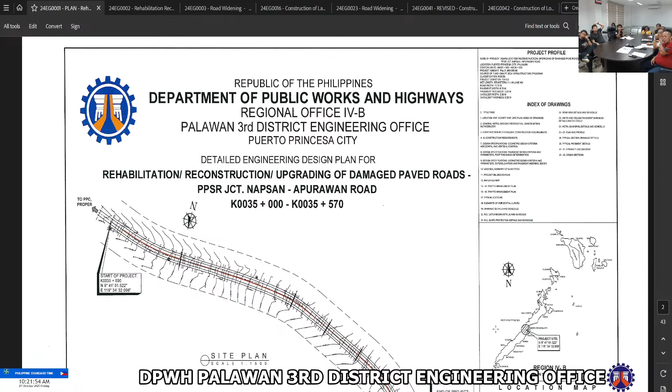Good morning po. Rehabilitation, reconstruction, upgrading of damaged paved roads, PPSR Junction, Napsan, Apurawan Road, kilometer 0035 plus 000 to kilometer 0035 plus 570. Next page. Sa upper right side po. Project po. Sabihin po. Opo, konti.

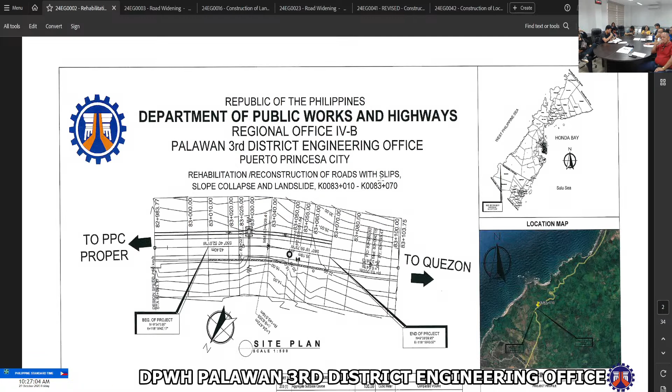For contract ID 24EG0002, Rehabilitation, Reconstruction of Roads with Slips, Slope Collapse and Landslide, Aramaywan-Berong-Quezon, Puerto Princesa Road. Contract location K0083 plus 010 to K0083 plus 70, Aborlan, Palawan, with ABC amount of 5,243,000. For this project, we have other general requirements. Project billboard hanggang dun po sa mobilization and demobilization. Sa works po, meron po tayong removal po ng existing structures which is 0.23 meter thick PCCP.

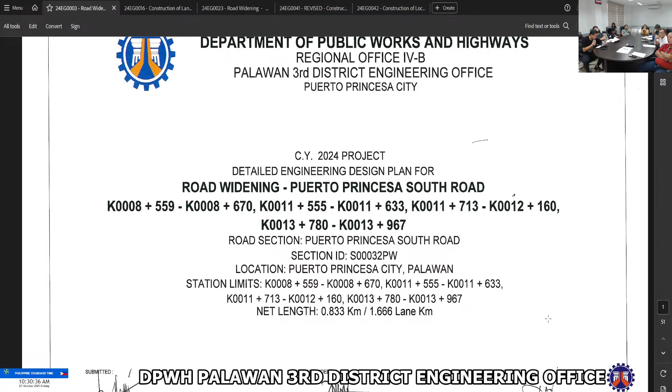Contract ID 24EG0003, road widening Puerto Princesa South Road. K008 plus 559 to 008 plus 670, next station is K0011 to 11 plus 633, 11 plus 713 to 12 plus 160, 13 plus 780 to 13967. ABC amount is 27,440,000. So, yung project natin is widening.

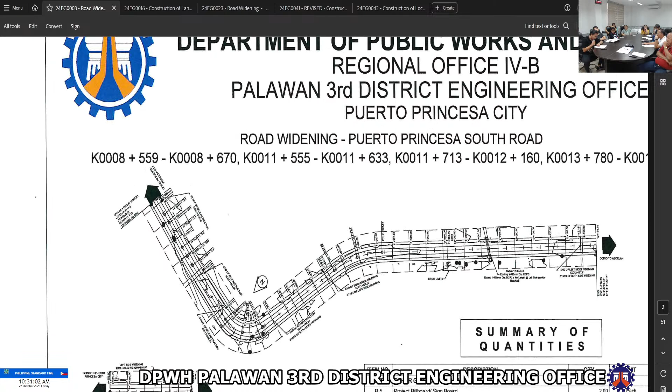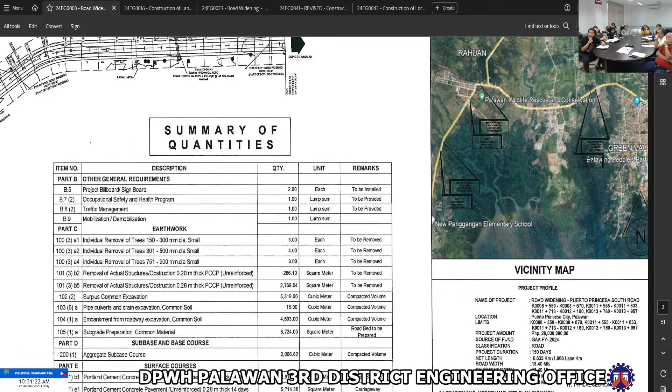Then sa project profile, ang target total width natin ng road is 18.4 meters, which is 13.4 ang carriageway and 2.5 meters yung shoulder. Quantities are project billboard, occupational safety and health program, traffic management, mobilization. May removal of trees, then removal of actual obstruction and existing pavement, which is 28 and 20 kasi may reconstruction tayo para tumama yung alignment sa Aramaywan Bridge.

Surplus excavation, pipe culvert, embankment, subgrade preparation, aggregate subbase course, then 20 and 28 thick ng PCCP for shoulder and carriageway, reinforced steel para sa line ditch, U-type, and culvert, 910 stone masonry para sa culvert din. Then white na thermoplastic para sa ating for safety.

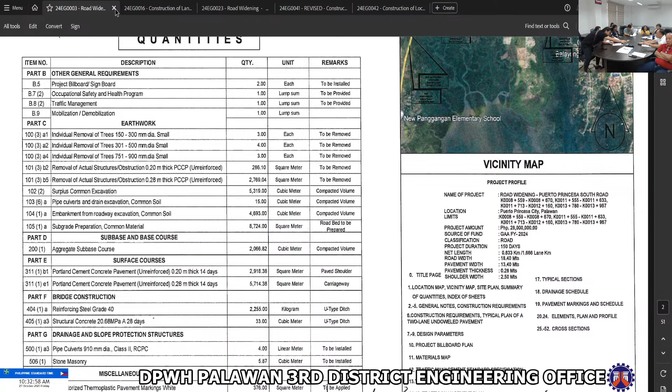Next project, contract ID 24EG0016, construction of Langogan Pedestrian Suspension Bridge. Good morning. I'm going to discuss contract ID 24EG0016, which is the construction of Langogan Pedestrian Suspension Bridge. An overview, this project is a 110 meters pedestrian suspension bridge located at the resettlement Caritas, Barangay Langogan.

This project comprises the construction of two reinforced concrete towers and installation of 40 mm diameter main cable with a suspender or hanger cable of 16 mm, and a cross beam and floor planks. I'm going to discuss the specification of the cable first. The cable, a very important part of the bridge, is wire rope 6 by 36 grade 1960 Newton per millimeter square IWRC, which is an independent wire rope core.

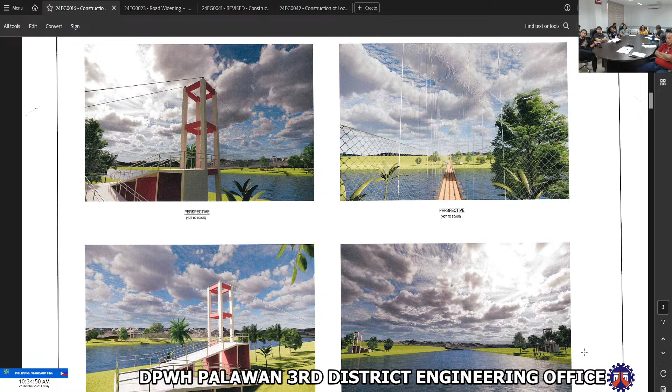The scope of work of this project is the project billboard and signboard, then occupational safety and health program, mobilization and demobilization. Then there's structure excavation, common soil, comprised of 599.28 cubic meters. Then the embankment from structure excavation, which is 61.44, and a gravel fill of 9 cubic meters.

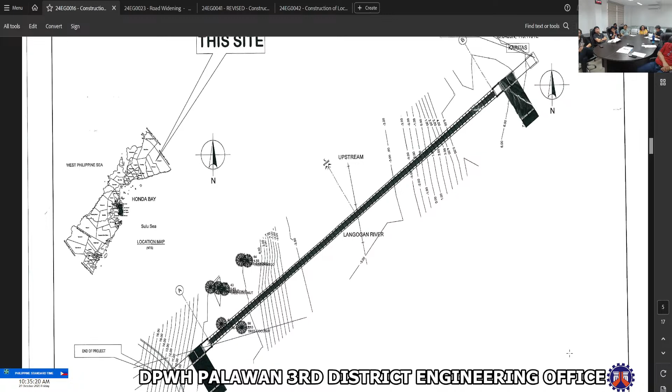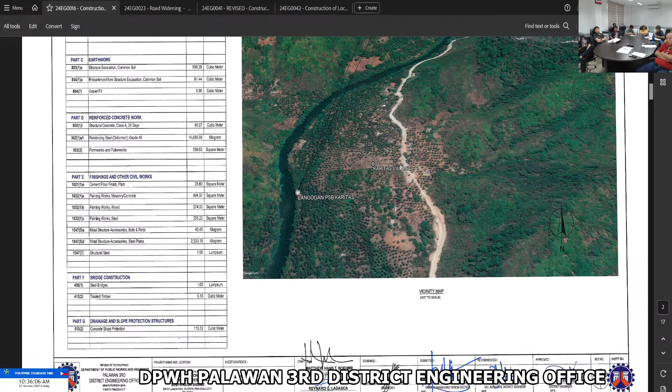Then structural concrete, the construction of the towers and the anchor block, which is 45.37 cubic meters. Reinforcing steel deformed bar, grade 40, 14,680.66 kilograms. And formworks, 558.83 square meters. For finishing and other civil works, the cement floor finish, plain, 23.6 square meters, and painting works for masonry concrete, 804.57 square meters. Painting works for wood, the floor planks, 274 square meters.

Then painting work for the steel, 255.22 square meters. The metal structure accessories, bolts and rods, these are the thimbles, the U-bolt part of the structure, which is 40.40 kilograms. The metal structure accessories and steel plates, this part is the anchorage, the construction of the pulley. And the structural steel, this is the cross bracing, the cross beam where the floor planks will be installed.

Then for concrete slope protection, we have 113.52 cubic meters. And this item is steel bridge, the supply, delivery and construction of the wire rope, one lump sum, and the treated timber, 9.10 cubic meters. This treated timber are the floor planks of the project. That's all. For any question, please visit our office, planning design section.

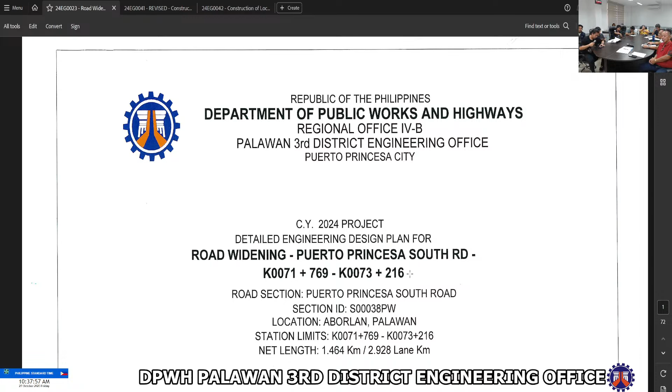Contract ID 24EG0023, road widening Puerto Princesa South Road, K0071 plus 769 to 73 plus 216, with an approved ABC amount of 58,918,580 pesos. So this project is a road widening along Puerto Princesa South Road, Station 71 plus 769 to 73 plus 216, with a calendar days duration of 206.

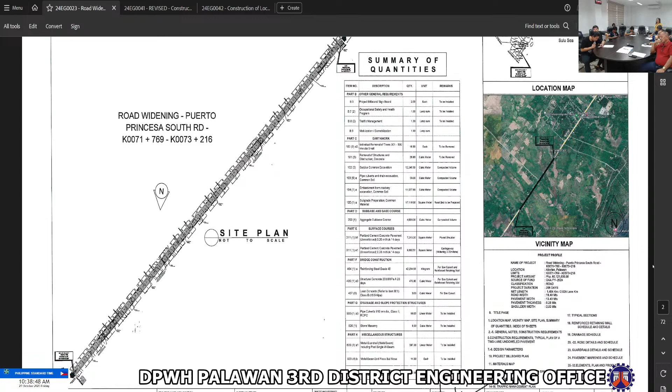Net length is 1.464 kilometers. It is a both side widening of the road with a target road width of 18.4 meters. Pavement width is 13.4 meters, 0.28 thickness, and 2.5 width shoulder.

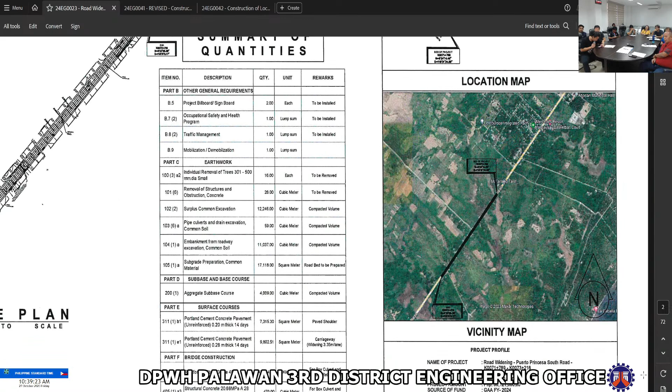So the quantities are project billboard, occupational safety and health program, traffic management, mobilization, demobilization, removal of trees, removal of structures, surplus excavation, culvert and drain excavation, embankment from roadway excavation, subgrade preparation, common material, item 200, item 311 for paved shoulder, 311 1E1, 0.28 thick PCCP for the carriageway, which is 3.35 per lane.

Reinforced steel, grade 40, and structural concrete 20.68 MPa at 28 days for box culvert and retaining wall, reinforced retaining wall. Lean concrete for the box culvert, pipe culvert 910 for cross drain, stone masonry for the head wall, metal guardrail, end piece bull nose and reflectorized thermoplastic for safety. So yun lang po.

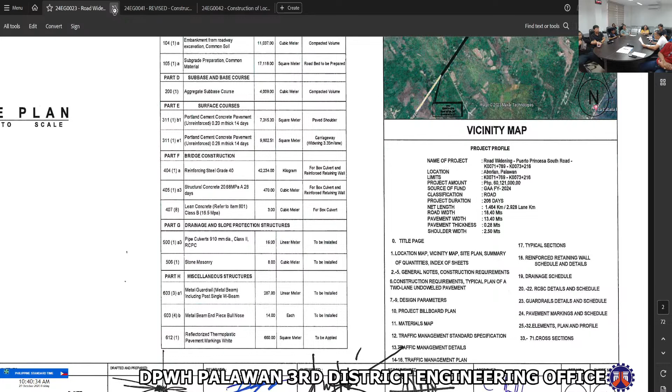Next, contract ID 24EG0041, construction of road, Barangay Magbabatin. Meron ba? Isa lang. 24EG0041, construction of road, Barangay Magbabatin, Aborlan, Palawan. Station 0+00 to Station 0+243.

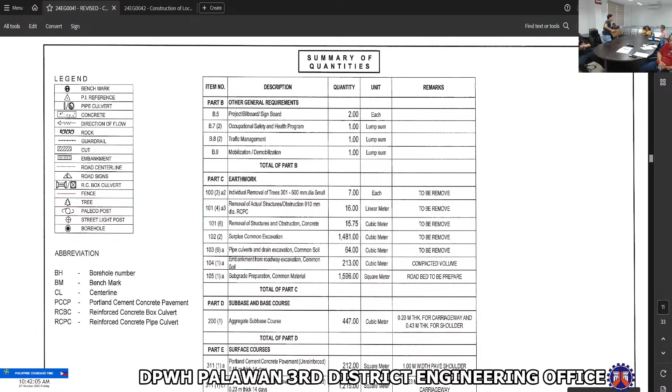So, meron din po 0.23 meters thickness na carriageway. Pababa. So, reinforcing steel grade po para sa ating head wall. Reinforced concrete head wall and RCPC na 910 mm diameter, remove and replace. Meron din po tayong grouted riprap na class A para po sa wing wall ng ating reinforced concrete head wall na slope protection. Yun lang po. O may tanong po ulit, punta lang po sa planning.

Project contract ID 24EG0042, construction of local roads at Barangay Kabigaan. Hello po, good morning po. For the contract ID number 24EG0042, contract name, construction of local road at Barangay Kabigaan. Contract location, station 0+000 to 0+426 meters. Next page po. Net length po natin is 0.426 kilometer. Physical target 0.852 lane km.

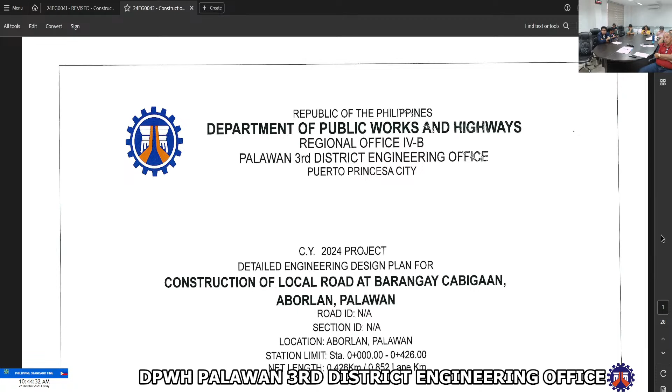For the summaries of quantities, we have a project billboard, occupational safety and health program, traffic management, mobilization, demobilization. For earthworks, we have removal of actual structures and obstruction, 910 mm diameter RCPC, 9 linear meter. Surplus common excavation, 1,946 cubic meter. Pipe culvert and drain excavation, 40 cubic meter.

Embankment from roadway excavation, 2,123 cubic meter. Subgrade preparation, common materials, 3,431 square meter. For part D, or sub-base and base course, item 200, aggregate sub-base course, we have 1,139 cubic meter. For surface courses, Portland cement concrete pavement, unreinforced, 0.15, 39 square meter paved shoulder. Tapos Portland cement concrete pavement, unreinforced, 0.23, 2,152 square meter carriageway.

And for drainage and slope protection, we have pipe culvert, 910 mm diameter, class 2 RCPC, 9 linear meter. And item 506, stone masonry, we have 52 cubic meter. Ano sir? Okay, sir. Sa road width, we have 8 meters. Pavement width natin is 5 meters. Thickness nga po is 0.23. Tapos yung shoulder natin na 1.5. Yes, sir. Yun lamang po. Any questions po, sa design plan inspection na lang po. Thank you po.

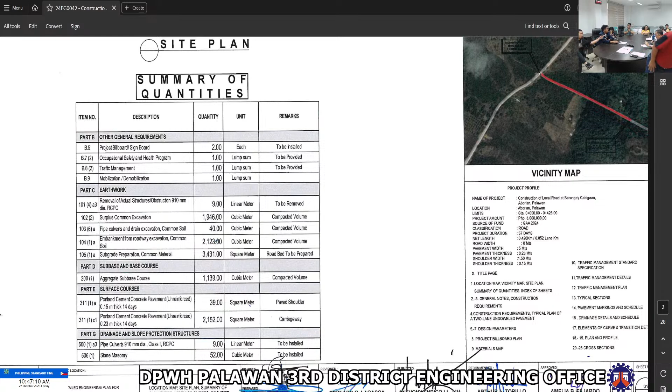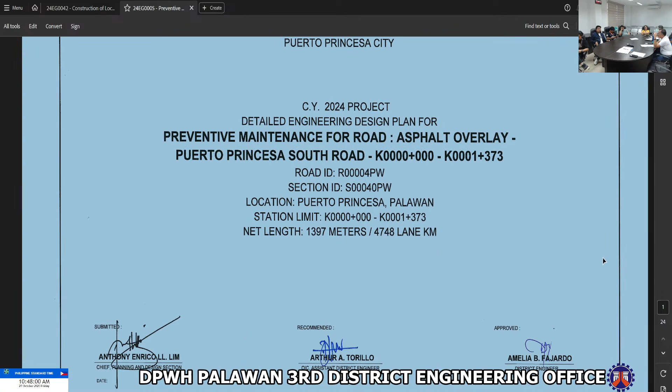We have the next project, contract ID 24EG0005, preventive maintenance of road, asphalt overlay, Puerto Princesa South Road. Engineer Maulog will be the one to discuss this. Okay. Good morning. Contract ID 24EG0005, preventive maintenance of road, asphalt overlay, Puerto Princesa South Road, K000+00 to K001+373. ABC amount is 971,150.

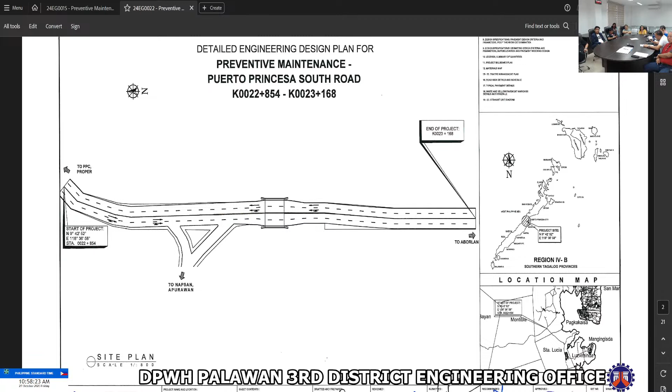Okay na, next. Contract ID 24EG0030. Preventive maintenance of road, asphalt overlay and bridges and approaches along Puerto Princesa South Road.

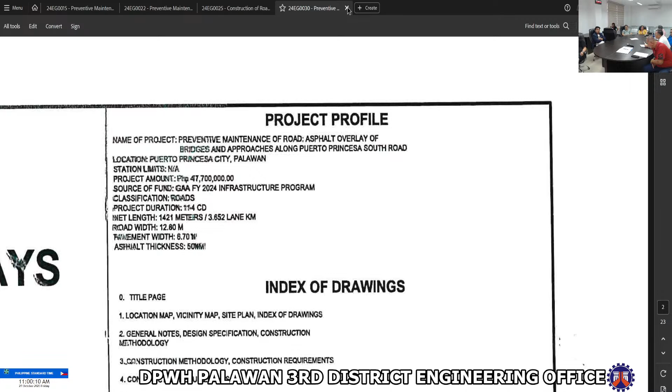Okay. Thank you. Contract ID 24EG0039. Construction of road, Barangay San Manuel. Sino in charge dito? Discuss. Okay. Contract ID 24EG0025, construction of road leading to Mount Calvary.

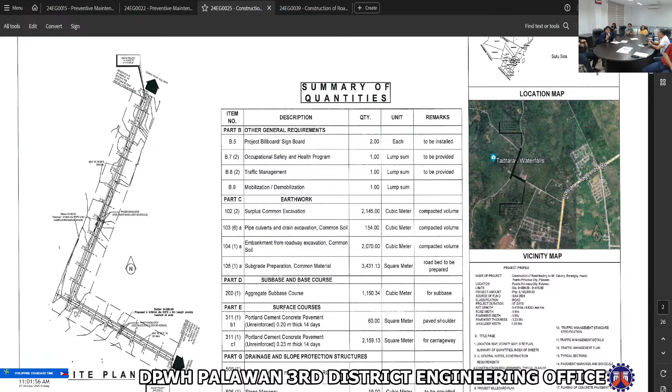For earthworks we have surplus common excavation 2,145 cubic meters. For pipe culvert and drain excavation we have 154 cubic meters. For embankment from roadway excavation, common soil 2,070 cubic meters. Subgrade preparation common materials 3,431 square meters. For aggregate subbase course, we have 1,150.34 cubic meters. For surface courses, we have Portland cement concrete pavement 0.2 thickness, 60 square meters. For Portland cement concrete 0.23 thickness, we have 2,159 square meters.

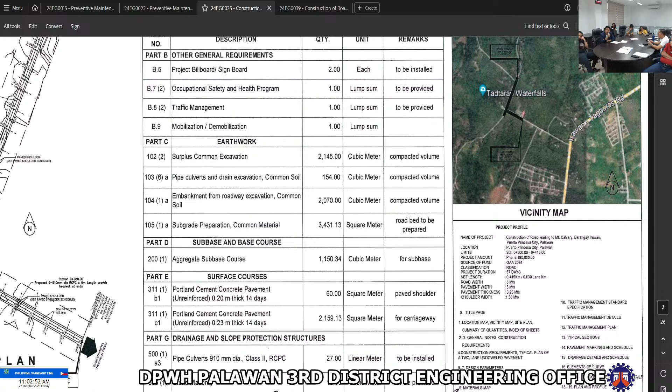And for drainage and slope protection, we have pipe culvert 910 mm diameter class 2 RCPC 27 linear meters, and stone masonry 19.0 cubic meters. Road width is 8 meters, pavement width is 5 meters, thickness is 0.23, and we have shoulder of 1.5. Kadugtong lang ito papuntang Mount Calvary.

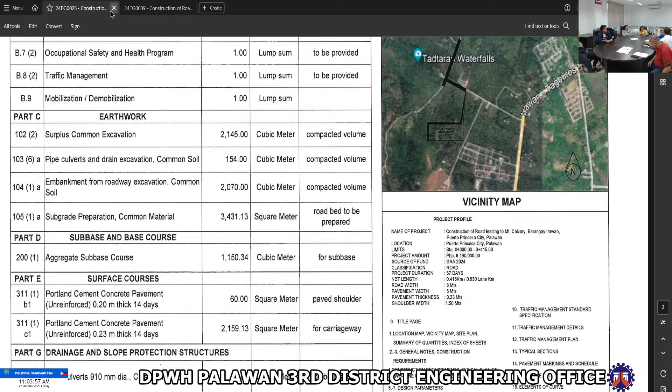Construction of road, Barangay San Manuel, Puerto Princesa City, Palawan. First section, station 0+00 to station 0+337.5, and our second section, station 0+00 to station 0+061. Ano po sa next page? Upper right bullet sa project profile.

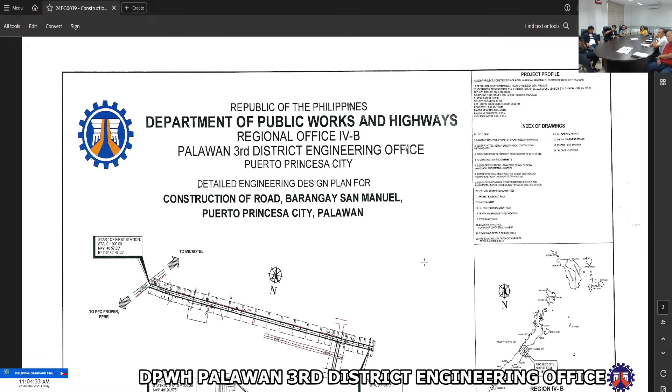Ayan po. Okay po. So yung ating road width po is 5.2 meters to 7 meters. Yung 5.2 meters po is para sa ating first section, with carriageway na 4 meters and shoulder of 0.6 meters. And sa ating second section po, na 5 meters yung carriageway and 1 meter po yung shoulder width.

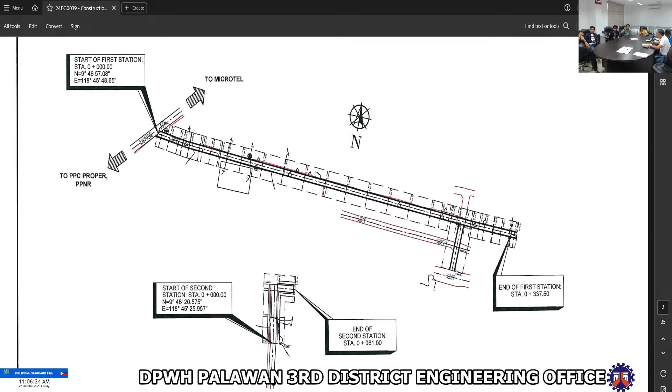Next, contract ID 24EG0043, construction of road, Barangay Santa Monica. For the contract ID number 24EG0043, contract name, construction of road, Barangay Santa Monica. Contract location, station 0+00 to 0+220, Puerto Princesa City, Palawan. ABC amount, 4,950,000.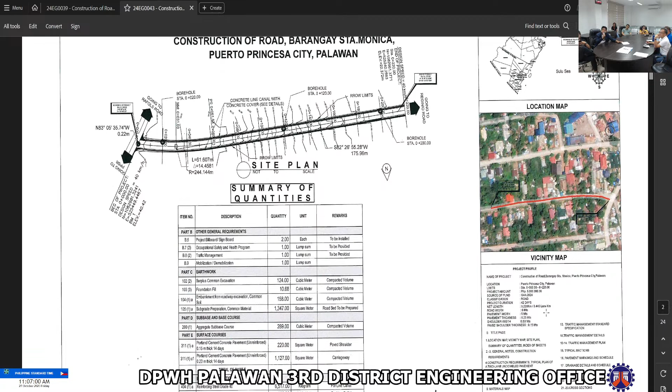The summary of quantities, we have project billboard, occupational safety, traffic management, and mobilization. For earthworks, we have surplus common excavation, 124 cubic meter. Foundation fill naman, 10.68 cubic meter para sa ating line canal. Tapos, embankment from roadway excavation, 158 cubic meter. Subgrade preparation with common material, 1,347 square meter. Aggregate subbase course, we have 289 cubic meter.

For item 311, surface courses, Portland cement concrete pavement, unreinforced, 0.15 thickness, we have 220 square meter. Tapos Portland cement concrete pavement, 0.23 thickness, 1,127 square meter carriageway. For bridge construction, we have reinforcing steel grade 40, 6,517 for line canal. For item 405, structural concrete, 20.68 MPa at 28 days, we have 108 cubic meter for line canal.

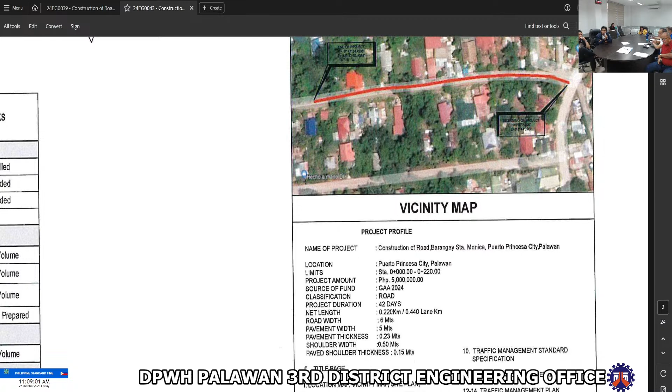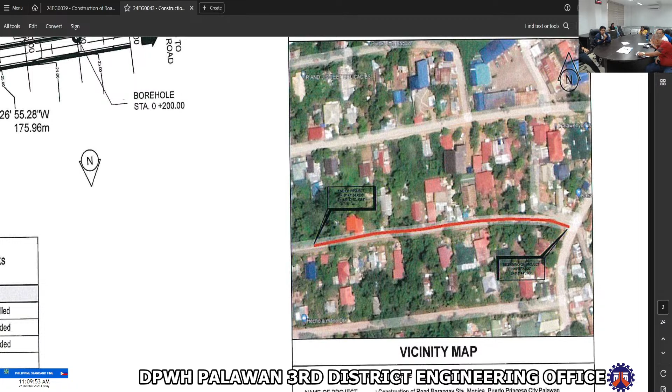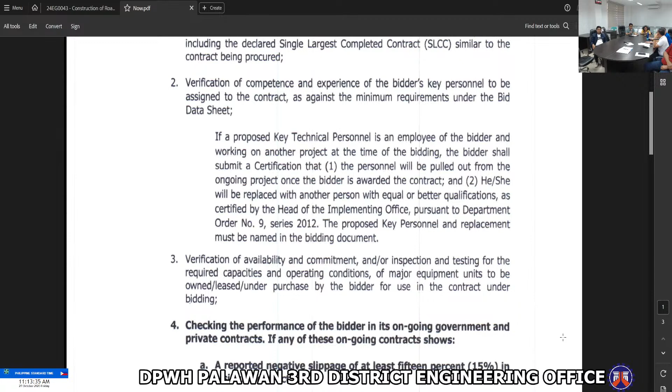Hello. May pinapaabot ho ang aming resident auditor na kung kayo ay magli-list ng equipment, it should be conditional list lang po. Until na may award ho sa inyo yung contract, doon na kayo magsasubmit ng list ng equipment. So number 4, checking the performance of the bidder in its ongoing government and private contracts.

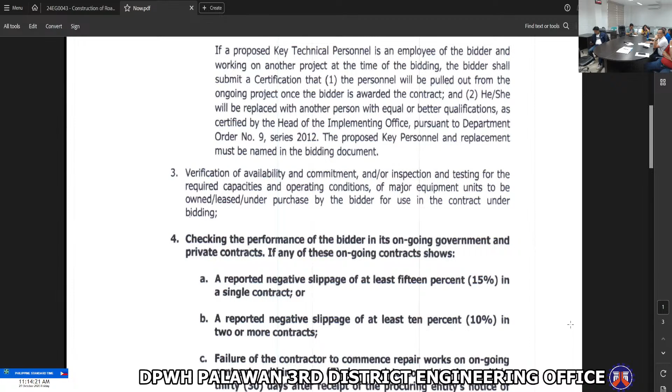If any of these ongoing contracts shows, ito kaya naka-bold yung letters niya, talaga ito is ini-emphasize ho dito sa aming DO. So letter A, reported negative slippage of at least 15% in a single contract, or a reported negative slippage of at least 10% in 2 or more contracts. Letter C, failure of the contractor to commence repair works on ongoing contracts within 7 days and to complete them within 30 days after the receipt of the procuring entity's notice of defects and deficiencies.

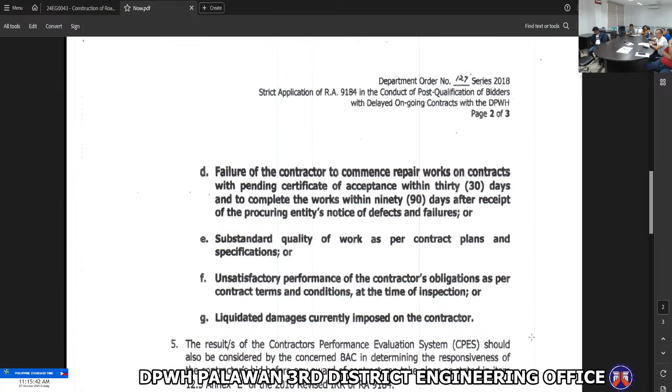Ang magdedetermine po nito is yung aming mga testing sa inyong mga ginagamit po na materials or yung in place. And letter F, unsatisfactory performance of the contractor's obligations as per contract terms and conditions at the time of inspection.

Meaning, kung meron po kayong mga defects pa or deficiencies, and isa pa po, ipinapasok dito ng aming state auditor yung compliance nyo po sa CSHP. And last but not the least, liquidated damages currently imposed on the contractor.

Then number 5, the results of the contractor's performance evaluation system or CPES should also be considered by the concerned BAC in determining the responsiveness of the contractor's bid before any award of contract can take place as stated in item 12.5 Annex E of the 2016 revised IRR of RA 9184. Ito po naman naka-specify doon na yung final rating po.

So, if the BAC verifies any of these deficiencies to be due to the contractor's fault or negligence, the agency shall disqualify the contractor from the award for the procurement of infrastructure projects.

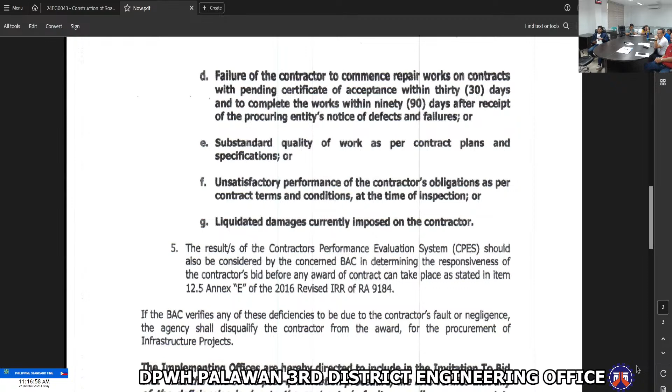The implementing offices are hereby directed to include in the invitation to bid that if at the time of the post-qualification procedure, the BAC verifies that any of the deficiencies is due to the contractor's fault or negligence pursuant to 34.3B2C of the 2016 revised implementing rules and regulations of Republic Act 9184 or the revised IRR of RA 9184, the procuring entity shall disqualify the contractor from the award without any right to reimburse fees and incidental cost paid for the procurement of infrastructure contracts subject of the bid. Ito ho isa naka-indicate po sa aming ITB.

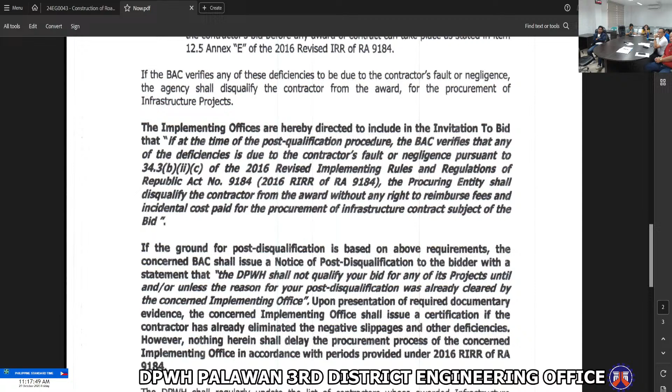And then, if the ground for post-disqualification is based on above requirements, the concerned BAC shall issue a notice of post-disqualification to the bidder with the statement that the DPWH shall not qualify your bid for any of its projects until and or unless the reason for your post-disqualification was already cleared by the concerned implementing office. So, i-check pa rin naman po namin kung na-comply nyo na po yung aming mga letter or whatever findings na naipareceive namin sa inyo.

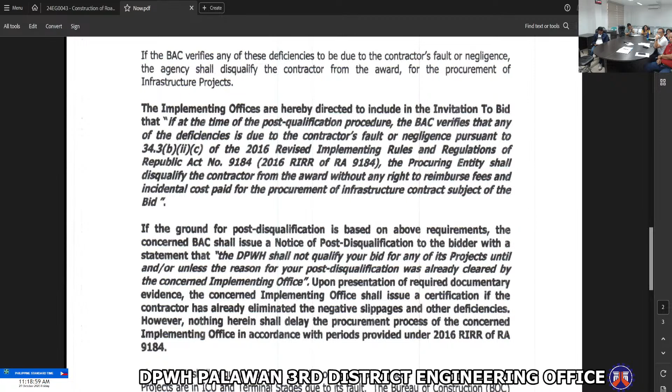Upon presentation of required documentary evidence, the concerned implementing office shall issue a certification if the contractor has already eliminated the negative slippages and other deficiencies. However, nothing herein shall delay the procurement process of the concerned implementing office in accordance with periods provided under 2016 revised IRR of RA 9184. Ibig sabihin po, hindi namin kayo hihintayin na makomply nyo. So, dapat po, upon receive po ng mga notices sa inyo, dapat po makomply nyo na lahat yung mga deficiencies or whatever na requirements na hinihingi ng opisina.

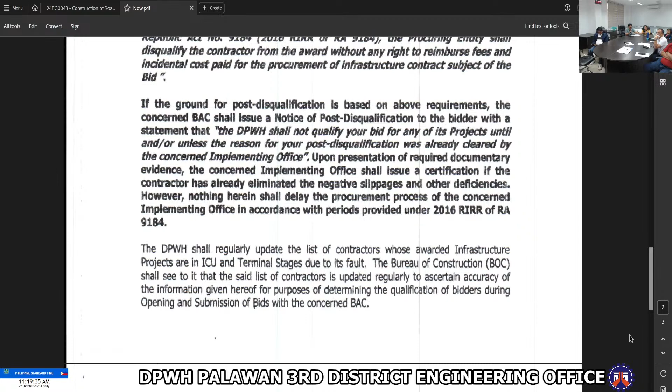So, the DPWH shall regularly update the list of contractors whose awarded infrastructure projects are in ICU and terminal stages due to its fault. The Bureau of Construction shall see to it that the said list of contractors is updated regularly to ascertain accuracy of the information given hereof for purposes of determining the qualification of bidders during opening and submission of bids with the concerned BAC. Ito po, meron din sa aming sanction, so talagang kailangan ma-implement po namin to. The concerned implementing offices should ensure that this directive is strictly enforced.

Failure to do so after due process shall make the concerned official or employees, including the concerned BAC members, liable to the administrative penalties in accordance with the range of penalties prescribed under Section 50B4, 50D1, and 50F, Rule 10 of the 2017 Rules on Administrative Cases in the Civil Service, 2017 RACCS, as the case may be, to wit: first offense, reprimand, suspension of 1 month and 1 day to 6 months, and suspension of 6 months and 1 day to 1 year. Second offense, suspension of 1 day to 30 days, dismissal, and dismissal, inefficiency and incompetence in the performance of official duties. And third offense, dismissal na.

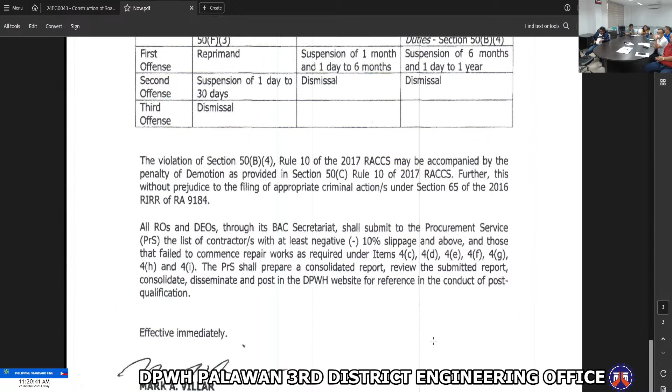The violation of Section 50B4, Rule 10 of the 2017 RACCS may be accompanied by the penalty of demotion as provided in Section 50C, Rule 10 of 2017 RACCS. Further, this is without prejudice to the filing of appropriate criminal actions under Section 65 of the 2016 RIRR of RA 9184. All ROs and DEOs through its BAC secretariat shall submit to the procurement service the list of contractors with at least negative 10% slippage and above, and those that failed to commence repair works as required under items 4C, 4D, 4E, 4F, 4G, 4H, and 4I. The procurement service shall review the submitted report, consolidate, disseminate, and post in the DPWH website for reference in the conduct of post-qualification.

Effective immediately. Signed, Secretary Mark A. Villar. Ayun lang po. So, binibigyan diin namin ang DO po na to. So, sana po wag niyong baliwalain. Thank you po.

Okay, thank you, Engineer Darius, for the information. And meron pang additional